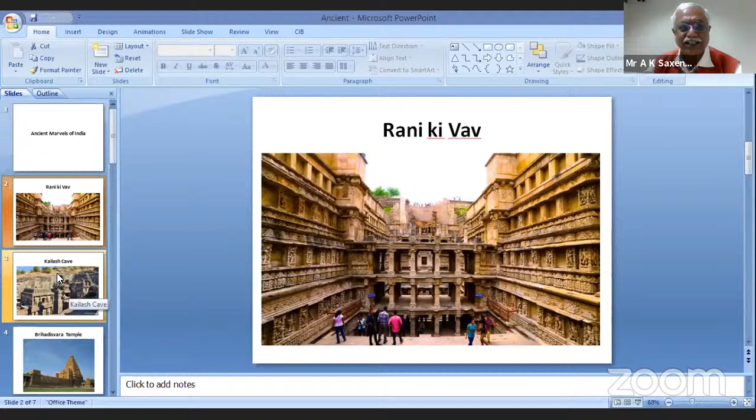Next we come to Kailash Cave, which is part of the Ellora Caves. It was built in the 8th century. It is a real wonder because all the construction has gone from top to bottom, and it is worth mentioning just like any other wonders of the world.

Next we have the Brihadisvara Temple, which is in Tamil Nadu. It is an 11th century temple with no foundation. Pranam, Minister Sahab, Namaskar, welcome. Sir, Namaskar.

It is 66 meters in height with no foundation, built with granite, and the granite is not found in that area. It is simply a marvel how this was constructed. The main point is that the Vimana, or the tower above the Sanctum Sanctorum, does not cast a shadow even at noon time.

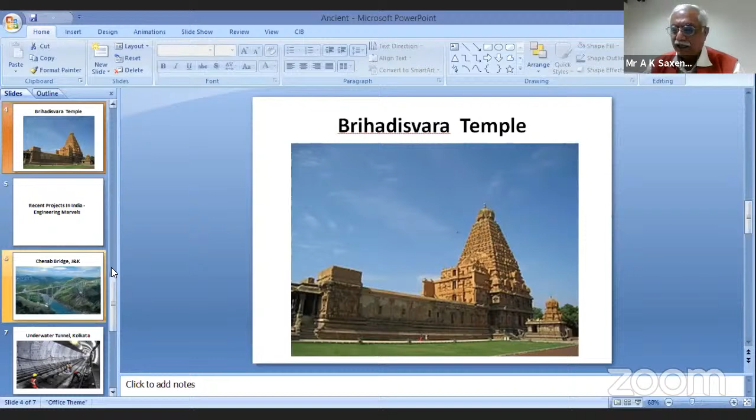With this, we move forward. The construction industry has traditionally been labor intensive, and mechanization was never resorted to. In those days, the speed of construction was very slow, and generally the projects got delayed, causing cost overruns.

With liberalization and globalization, the speed of civil construction has increased manifold. Under the dynamic leadership of our Honorable Minister, a 2.5 kilometer 4-lane concrete road was completed in 24 hours, and 26 kilometers of single-lane bitumen road was completed in 21 hours. Another example was the Instacon Tower in Mohali, Punjab, a 10-story building completed in 48 hours in 2012.

India's economy is likely to grow 2.5 times to $7 trillion by 2030, making India the world's 3rd largest economy. For this, much improved infrastructure is required. The Sagarmala project and Bharatmala Pariyojana are programs for development of infrastructure. Our Prime Minister has recently launched the National Master Plan Gati Shakti to connect the economic zones.

A large-scale migration has been witnessed in the urban sector. In order to meet the growing needs, the government has launched the Pradhan Mantri Awas Yojana and affordable housing schemes. All these have put increased pressure on the construction industry, forcing them to think about mechanization and generate innovative ideas to meet demand. Civil engineers in India are not lagging behind.

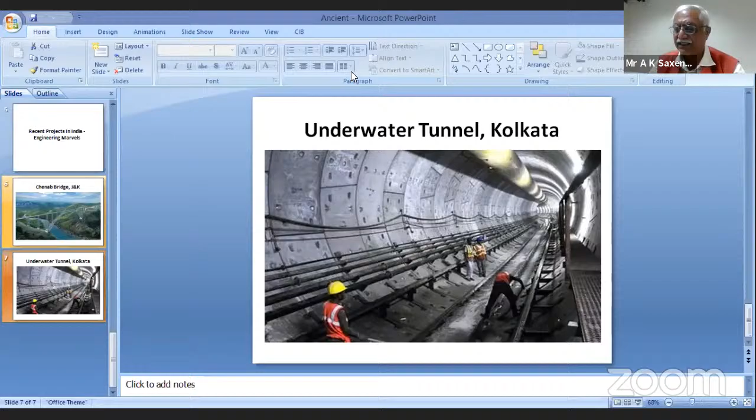Technology is perhaps the greatest agent of change, and it is evolving at an ever accelerating pace. There is a need to develop innovative technologies which will reduce costs, save natural resources, protect environment, and help improve quality of life. In future, we have to look for self-healing concrete, thermal bridging, photovoltaic glass, kinetic footfall, kinetic roads, predictive software, 3D modeling, modular construction, plastic roads, and green roof systems.

Keeping in mind the national agenda, the theme of the 36th National Convention of Civil Engineers was chosen as Innovation, Mechanization, and Modern Techniques in Civil Engineering. It is hoped that the deliberations over today and tomorrow will help the planners to meet the requirements for India to achieve its goal of a 7 trillion economy.

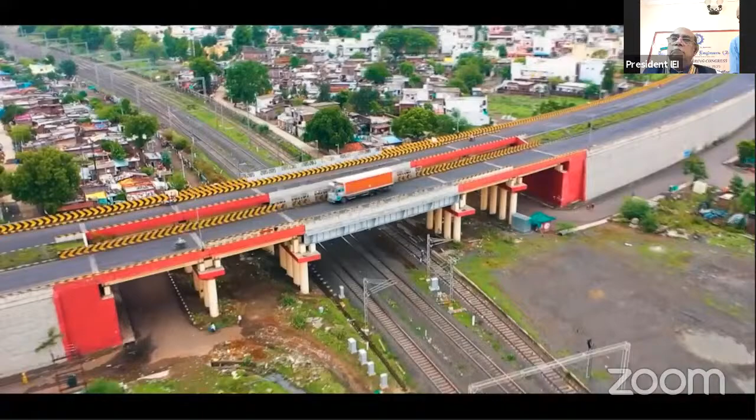The outstanding Swarnim Chaturbhuj Yojana, of which Shri Gadkari ji was chairman, is the culmination of these efforts. 55 flyovers dotting the city have made commuting in Mumbai much easier than ever before. The foundation for the magnificent Bandra-Worli Sea Link was also readied during this time.

The jewel in the crown of Maharashtra, India's first expressway, the world-class Pune-Mumbai Expressway, is also a futuristic project imagined and brought to fruition by Nitin Gadkari. Connecting over 13,000 unconnected villages with an all-weather $100 million project is another feat accomplished by this far-sighted visionary.

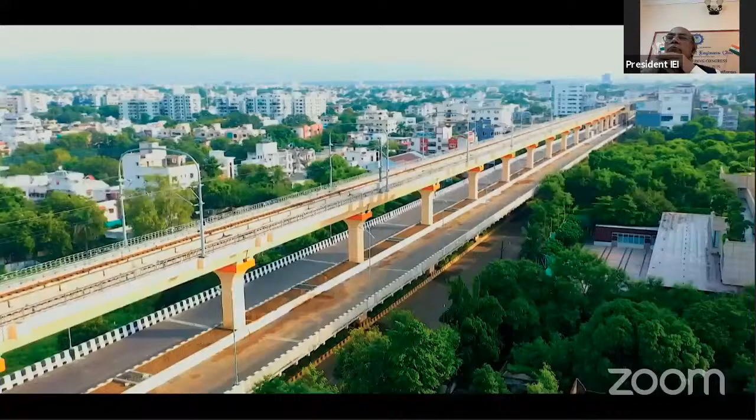Nagpur, his hometown, has seen the first of its kind double-decker bridge, with innovative beautification of flyovers using local artists and paintings of great political and social leaders as an added attraction. Ajni Intermodal Station will have connectivity between long-distance buses, city buses, railways, metro and an indirect link with the city airport.

The Nagpur Broad Gauge Metro is a commuter rail project planned for Nagpur city, extending up to adjacent areas of Wardha, Narkhed, Ramtek, Bhandara and Chhindwara.

World-class institutions like IIT, IIM and AIIMS emerge and thrive under his watchful gaze. This is in addition to over 1,000 Ekal Vidyalayas that go a long way in molding future tribal generations. Performing over 10,000 successful heart surgeries is another stupendous achievement in his illustrious career as a warm-hearted do-gooder.

The city of Nagpur is the first city to explore alternative biofuels for transport, including Bio-CNG buses. His innovative idea of India's first of its kind CNG-run tractor has proved to be farmer-friendly, cost-effective, and helpful in reducing air pollution.

In a historic push for biofuels, Gadkari ji is introducing flex engines which will run on 100% ethanol, directly providing additional income to farmers and the agricultural sector.

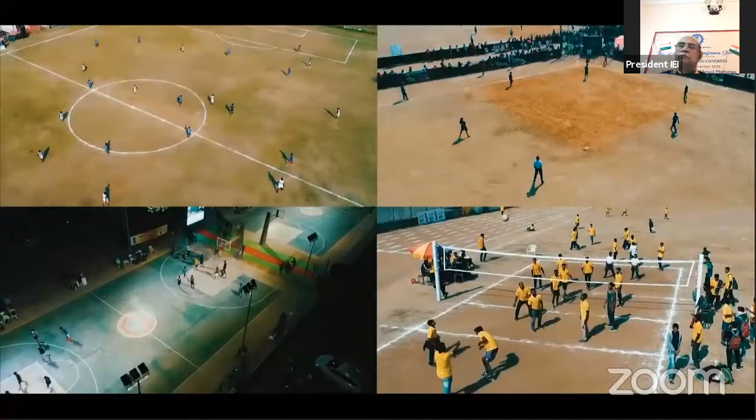Sanskritik Mahotsav motivates local artists to go national. Krida Mahotsav supports local sportsmen to showcase their abilities and motivates them to go national and Olympic level. Projects like AgroVision are helping farmers with the latest technologies and practices.

His idea of using sewage water for power generation, and the use of ethanol as fuel, have added a whole new dimension to the city's development program.

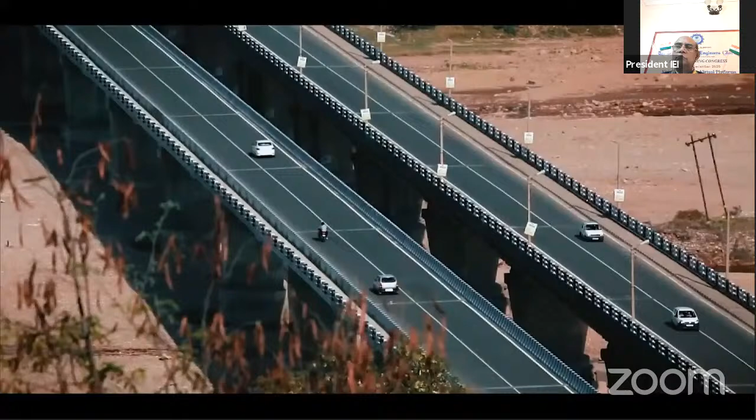As India's current Minister of Road Transport and Highways, he has re-energized the whole sector with his clear vision. With more than 40,000 kilometers of national highways constructed in the last 7 years, 60,000 kilometers of new roads are being constructed under his supervision. The speed of road construction has grown from a mere 3 kilometers per day in 2014 to 40 kilometers per day in 2021.

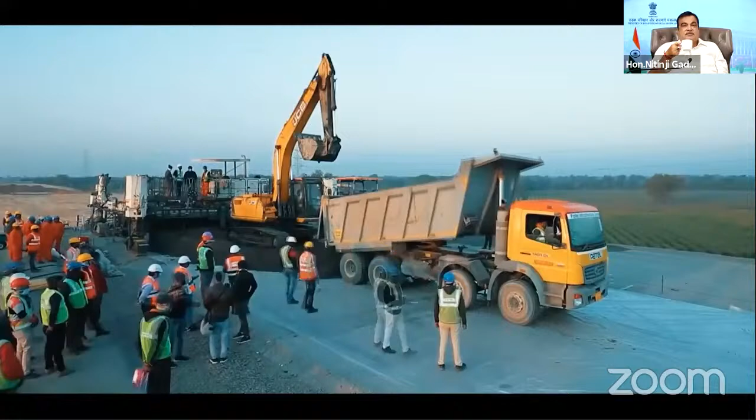The dazzling Delhi-Mumbai Expressway has set 4 new world records, with 12,500 cubic meters of concrete being laid down on a 4-lane stretch of 25.4 kilometers.

These world records are as follows: highway construction rate at 37 kilometers per day, construction of a 2.5 kilometer long 4-lane concrete road near Vadodara at the Delhi-Mumbai Expressway in 24 hours, and laying down of a 26 kilometer long bitumen road at the Solapur-Bijapur section of NH52 in 21 hours.

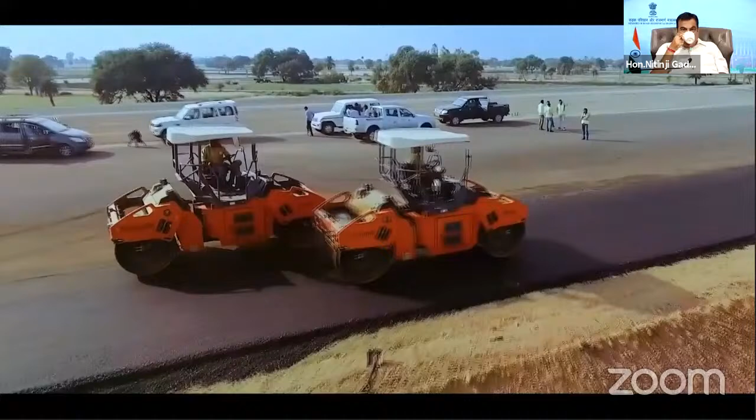A 50% growth in the length of national highways in the last 7 years of the NDA government is a monumental achievement. The figures went up from 91,287 kilometers to 1,37,625 kilometers. Going further, INR 3.32 lakh crore is allotted for 22 greenfield expressways, initiated by the bridge-building messiah, as he is fondly referred to.

Bharatmala and Sagarmala, 2 world-class access-controlled expressway projects led by Nitin Gadkari, are presently in various stages of construction. The Bharatmala project seeks to eliminate the perennial road traffic movement imbroglio across the country.

With Nitin Gadkari taking charge, India's much maligned logistics sector has also metamorphosed from a point-to-point model to a hub-and-spoke model. This multimodal transport system integrates railways, highways, inland waterways and airports, creating a highly effective transportation grid, substantially reducing logistics costs and pollution. 35 multimodal logistics parks, 50 economic corridors, and 10 intermodal stations are being readied for this monumental effort.

Logistics summits with international participants, including government organizations and the World Bank, leading to MOUs worth 2 lakh crore, have been held to add muscle to the initiative.

Among his other endeavors, unprecedented progress is evident in port industrialization, national waterway traffic, jetties for coastal tourism, Ganga-Yamuna cleaning, fundraising, asset monetization projects, and toll-operate-transfer.

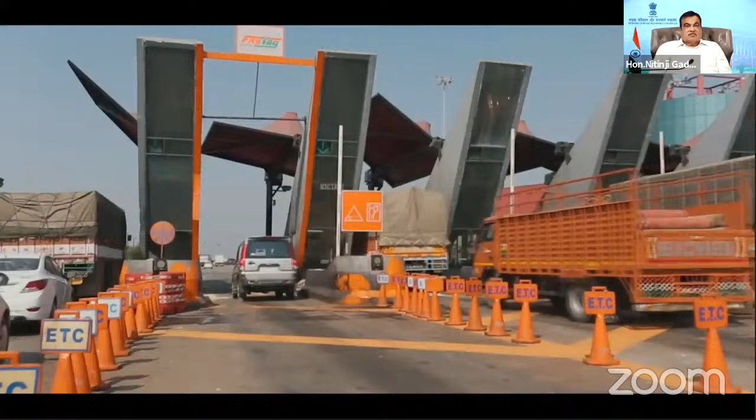As MSME Minister, he has gone all the way to promote entrepreneurship, helping rural youth adopt Khadi as a means of self-employment. The MSME Ministry has also found wings under Mr. Gadkari, who changed the definition for classification of MSMEs.

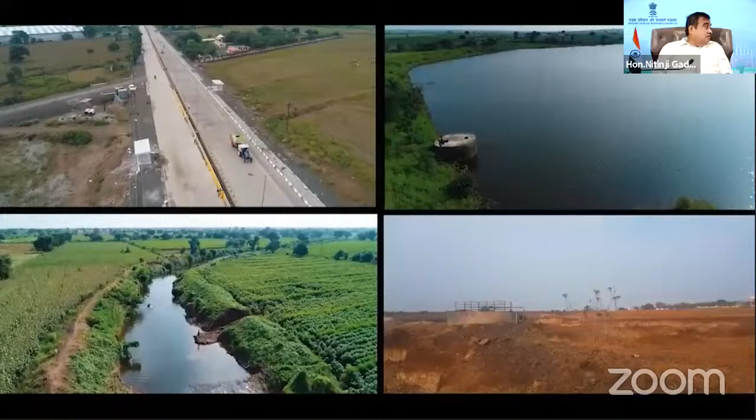Now, a company investing 1 crore and earning a turnover of 5 crore will be classified as micro company. The portal Udyam Registration (UR) offers faceless, fully online, paperless and transparent MSME registration process, fully integrated with income tax and GSTN systems. His brainchild, Jal Kranti, the Buldhana pattern of water conservation which changed the economy of villages by rejuvenating water bodies, has won a global award.

Mr. Gadkari introduced the first ever vehicle scrapping policy, which proved to be the fight against pollution and in the interest of road and vehicle safety. The new FASTag policy is helping commuters save their fuel and time on toll plazas.

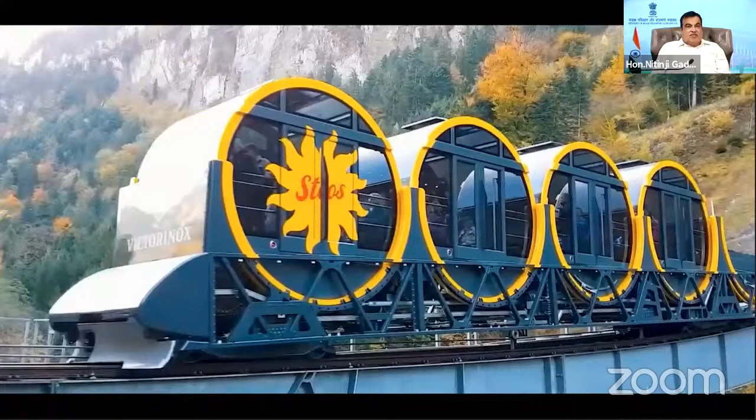Some of his major work includes an unprecedented push for research and development in electric vehicles, leading research and development for usage of waste materials in highway construction to cut down construction costs and generate wealth out of waste, developing ropeways and funicular railways in the remotest parts of the country to boost tourism, and the Panchgaon project for women making carpets from scrap cloth, a classic example of women empowerment.

Khadi Prakritik paint, made from cow dung, is aiding employment in rural areas and has exponentially improved the rural economy. When all industries were shut during the pandemic, Mr. Gadkari empathized with people by conducting webinars and over 800 video conferences.

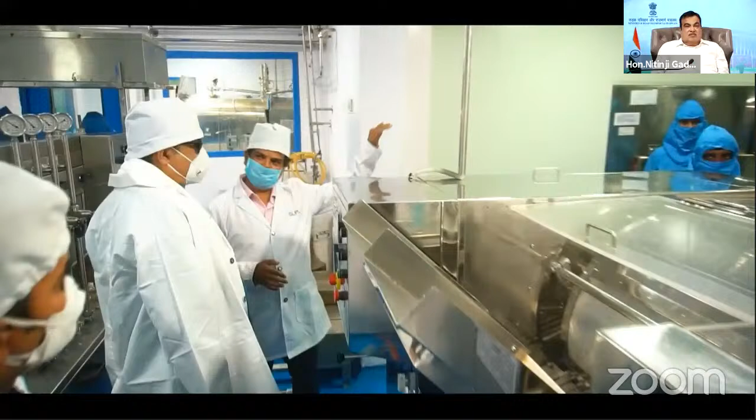His quick decision making in procuring oxygen and PPE kits helped those affected by the deadly virus. He generously donated ambulances to NGOs, helped set up oxygen plants, and set up factories to make remdesivir injections and injections for mucormycosis. Thus, by showcasing strong leadership and taking quick decisions, he handled the COVID situation effectively.

His affable nature goes beyond everyday personal equations as he continues to transmit his radiance and ideas to every individual or organization with his unmatched zeal. Gifted with an ability to dream the seemingly impossible dreams and bring them to fruition also defines this clairvoyant visionary. Nitin Gadkari shines on as one of modern India's pioneering leaders, and his work stands as a template for the coming generations. If there ever was an infrastructure man of India, he would answer to the name Nitin Jairam Gadkari.

May I request the chief guest, President of the Institution of Engineers, President-elect, and all other dignitaries to kindly release the souvenir which has been brought out on this occasion.

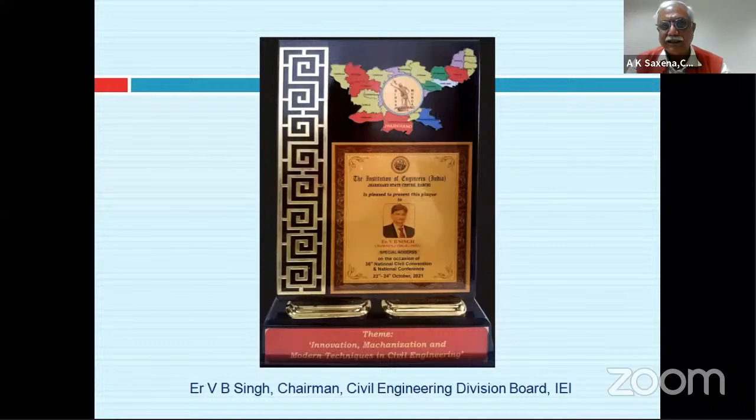To conclude the inaugural session, I would request Engineer Jitinder Kumar, Honorary Secretary of the Jharkhand State Center, to propose the vote of thanks.

Very good morning to our dynamic respected chief guest, Honorable Minister, Government of India, Shri Nitin Gadkari Sahab, Engineer Narinder Singh, President, Institution of Engineers, Engineer Thakre, President-Elect, Institution of Engineers, Engineer V.B. Singh, Chairman, CVDB, Engineer A.K. Saxena, Chairman, SCF, Shri Ranjan Singh, Chairman, Jharkhand State Center, past Chairmen, Secretary, and members. First of all, my congratulations on the 36th National Civil Convention and Conference. It is my privilege to offer the vote of thanks on this occasion. It is a proud moment for the institution that the most dynamic Honorable Minister Mr. Nitin Gadkari Sahab has kindly graced the National Civil Convention Conference as chief guest. Thank you very much for your time.

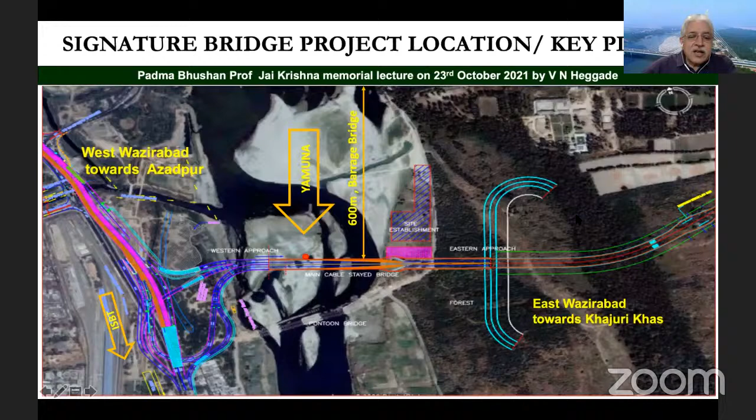This project consisted of two packages. One is the signature bridge, called package two, and the other, on either side of the western and eastern approaches, we had two more projects. That was a contract called the Wazirabad approaches contract. Both together amounted to around 1,500 crore rupees.

The signature bridge cost around 900 crore rupees by the time of completion, and the approaches cost around 450 crores. For both these projects, I was involved from the inception to the completion. As such, I am delivering this lecture as the constructor from inception to completion, or the commissioning and inauguration of this bridge, today.

This particular area was meant not only to ease the traffic from the western approach of Wazirabad to the eastern approach, but also to be developed into a tourist attraction. That was the plan way back in 2005 and 2006.

When the bridge was conceived, Sheila Dikshit, the Chief Minister of Delhi at that time, said, 'I don't want a run-of-the-mill bridge here. I want a bridge that is not built anywhere else in the world. When this area is developed, this bridge should be the tourist attraction, and the location should be known by this bridge. I want such a bridge at this location, so that not only does the area become a tourist attraction, but it is also known by the bridge itself, as historically happens all over the world, where the location is known by the artifact which has been built.' So that is how this bridge was inspired by the leadership of that particular time.

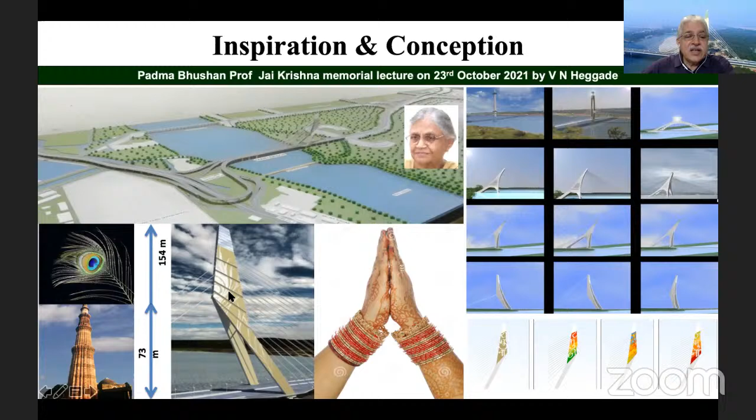Ultimately, this Namaste pose bridge was conceived and was to be implemented later. So as a run-up to this bridge, there are many historical moments, as you can see here. One moment is Sheila Dikshit's demand that she wanted a bridge not built anywhere else in the world. Second, if you really look at it, the bridge is not a conventional form following the forces kind of structural form.

In this bridge, the form is not following the flow of forces, following the shape of a namaste, the Indian welcoming pose.

This particular bridge, after many deliberations, was approved by Charles Correa, and the bridge was tendered three times before being finally awarded to the joint venture. All three rounds of tendering happened only because the price was found to be higher.

Ultimately, when it was referred to the Metroman of India, Sridharan, who was very active at that time during the fame of DMRC, the Delhi Metro Rail Corporation, he told the Chief Minister, when she said it was a very expensive bridge and that with the same cost two bridges could be built, that a Rolls-Royce cannot be constructed or bought at the price of an Ambassador.

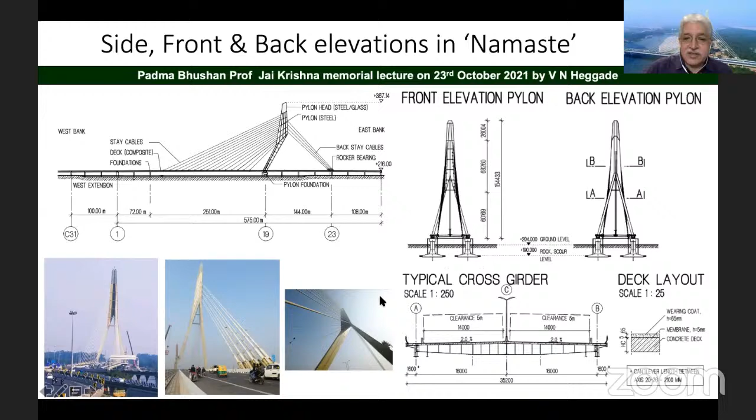I'll come to the explanation of the composite deck girder later, where I'm going to explain the fabrication as well as the erection of this one. Let me explain about the foundation and substructure aspect of this particular bridge.

This bridge had a 35.2 meter cross section, catering for 8 lanes of traffic, 4 lanes in each direction. The foundations were in 2 independent posts, as you can see here.

There were around 3 into 2, that's 6 number of open foundations, what I call deep open foundations. Though it's an open foundation, it's called the deep open foundation. There were also around 16 number of well foundations, as you can see here. Out of this 16, 2 were hybrid foundations, which I'm going to explain. That very innovative design and construction of this foundation is a hallmark of this bridge, which I'll explain later.

It has 2 planes of cables on the reverse side of the bridge, with 15 cables into 2 numbers, 2 planes each having 15 cables. On the other side, around 8 cables, 2 planes of 4 numbers. So total number of cables is 38. I'll explain the cables in detail later during the explanation of the bridge itself.

You can see in this photograph the construction of the foundations at the 2 independent posts, which is going on here. It's a Google image taken during construction. The pylon foundation is called the P19 foundation, which was very famous, and the backstay foundation is the P23 foundation. The rest of the foundations are normal conventional well as well as open foundations.

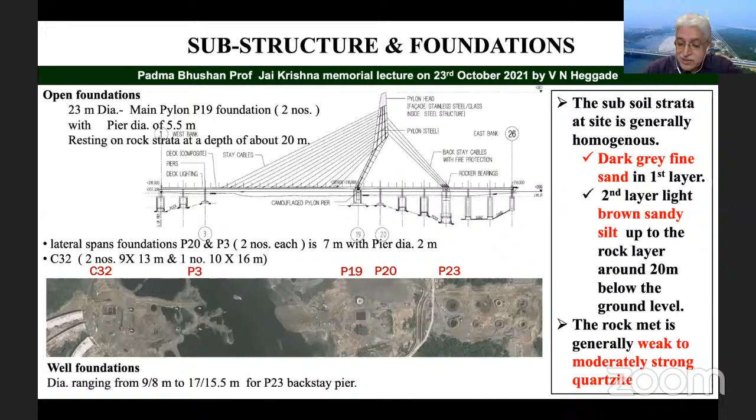The special foundations were P19 and P23, which are very famous worldwide at this point in time. It's very interesting to see the substructure, the bearing arrangement within the bridge system. It has around 2 fixed bearings at the pylon base location and 20 free bearings at different locations, shown here in violet color. There are also 2 longitudinally guided bearings, and importantly, a rocker pendulum bearing at the P23 foundation location, whose significance I'll explain later.

At the pylon foundation, there's a spherical fixed bearing of capacity 17,100 tons, the largest capacity bearing in India, perhaps, and maybe the second or third largest in the world. There's also a special rocker and pendulum bearing provided at the P23 location, because it has to neutralize an uplift force of around 6,380 tons.

This uplift force, because of the peculiar configuration of this bridge, has to be neutralized and ultimately transferred to the founding strata, so this bearing had to be provided. You can see here the rocker pendulum bearing configuration. It's a very significant bearing, and I'm going to explain the installation, fabrication, and erection of this bearing in detail.

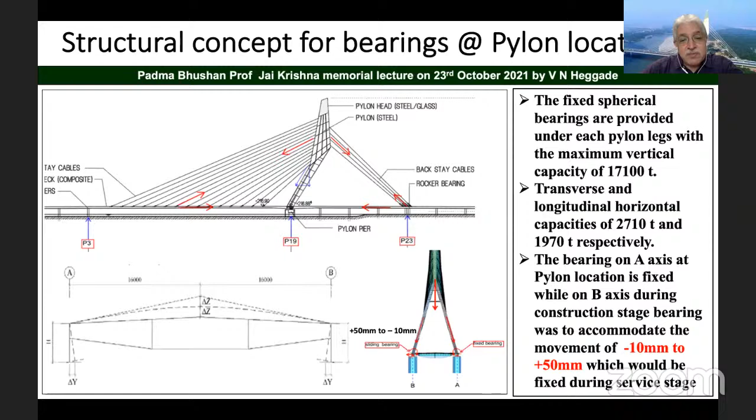On one side, during construction, it is fixed. On the other side, a play of around 60 mm is allowed. So the bearing has to be capable of absorbing 60 mm of play during construction. That was one of the specialities of this bridge.

Coming to the foundation, there were around 6 open foundations, as I explained earlier. All 6 open foundations were deep foundations, with founding levels varying from 10 to 20 meters depth at the river portion as well as at the embankment portion. In fact, the P19 pylon foundations were also deep open foundations.

Various excavated lateral systems in the form of sheet piling were examined. Some variations examined: one option was 2 independent foundations, as you can see here, combined with a single sheet piling cofferdam. Another option was an independent circular sheet piling cofferdam.

Ultimately, it was decided for all 6 open foundations to go for an independent square sheet piling cofferdam, as you can see here. Though the circular sheet piling would have been more economical in terms of quantity, from a construction point of view it was very difficult to build. That's why we went for the square type of sheet piling. These are some views of the sheet piling being done, and this deep open foundation sheet piling was done, as you can see here.

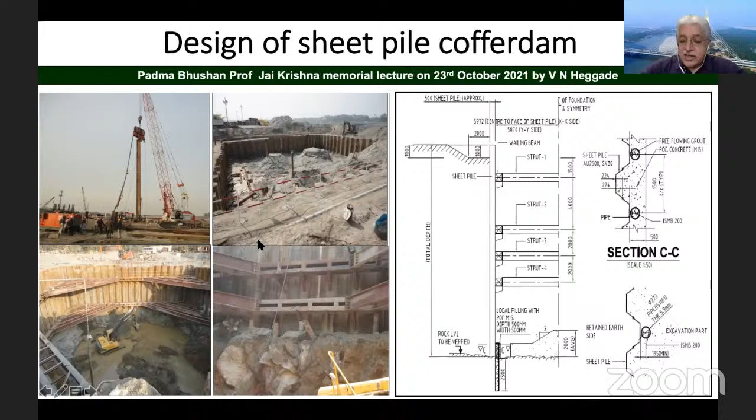These specially designed pins were installed over here, and this is one of the significant contributions of the design. These grouted pins within tubes have some reinforcement or steel segments, as you can see here, ISMB 200 within 273mm, later grouted to provide stability to the sheet piling, and that's how it has been done. At the location of the pylon, the deep open foundation was up to the level of 20 meters.

Up to the level of 20 meters, the sheet piling was to be driven earlier, and the open foundation was around 20 to 23 meter diameter, varying from edge thickness of 2.5 meter to 4.5 meter at the root of the pier. The pier was around 5.5 meter, and also the height of this pier cap, as you can see here, is 5.5 meter. This pier cap supported the independent pylon legs, as you can see here, which I'm going to explain.

The pier, as well as the pier cap, is constructed by conventional shuttering, as you can see here. But for the construction of the open foundation at the bottom, around 20 meters, we had to adopt sheet piling.

As you can see, I think there is some disturbance, sheet piling, particularly for the P19 foundations.

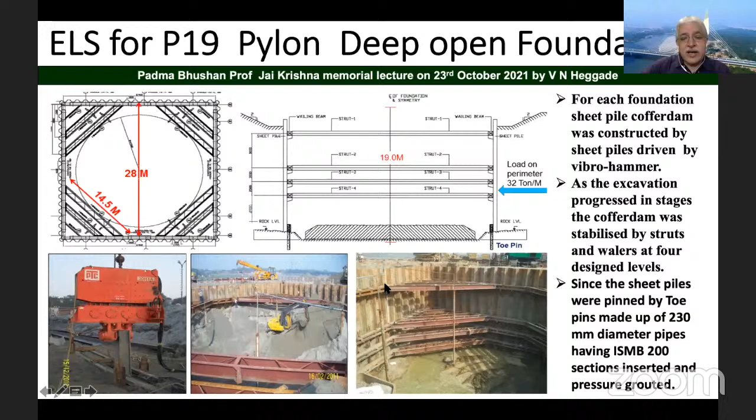Particularly for the P19 foundations, we had to have the strut and waler system at around 4 levels as the excavation proceeded, to stabilize the side slopes. As you can see here, naturally we had to have the pin arrangement, as I explained earlier, and the vibro hammer was used for driving the sheet piling, as you can see here.

Almost around 1,650 cubic meters of concrete was to be done at one go, which was done in one go.

But as it is mass concreting, and this kind of concreting has to be done at one go, a proper arrangement for chilling or controlling the temperature within the concrete was to be done.

This had around 280 tons of steel embedded into this foundation, and the reinforcement fixing itself of 280 tons at this level took around 40 days for us, and with a lot of precautions, this foundation was done.

You can see the brick wall was constructed as shuttering for this open foundation, which is at around 20 meters below the ground level.

A well designed well point system was designed for lowering the water table so that water is not ingressed or seeped into the pit, which has been supported by the sheet piling arrangement over here. Also, 35 HP pumps are used inside the sheet pile coffer dam for exclusion of the water within that. That's how these open foundations were done.

After having done the pylon foundation, it was very necessary for us to install the bearings which had been fabricated in Maurer Söhne and inspected for quality control purposes, to be installed on top of this pylon pier caps, as you can see here.

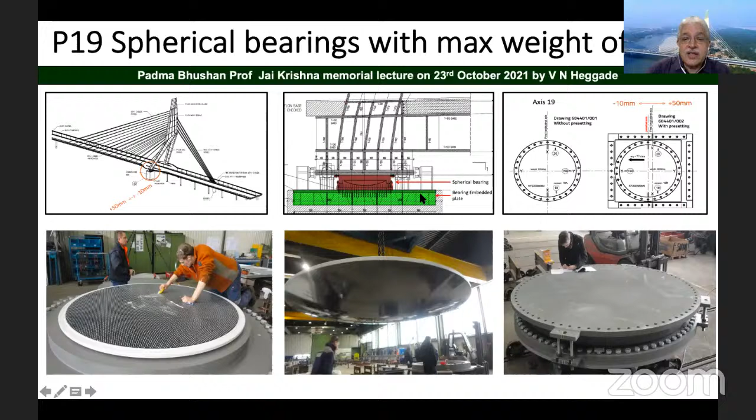These bearings were to be fixed on the bottom plate. As you can see here, this bottom plate is a part of the pier cap over here, and you can see the pier cap and the bearing. Under this, there is a bottom plate.

This bottom plate has to become a part of the pier cap on top of it, and the installation of the bottom plate while casting the pier cap itself was a project in itself. As you can see here, there is a frame which is hanging the bottom plate of the pier cap. Meticulously, the reinforcement of the pier cap has been fixed. After that, the shuttering has been put all around.

Once the shuttering is put, the pier cap bottom plate is held by this structural frame arrangement. Then the concreting has been done, and you can see the pier cap bottom plate which is ready to receive this bearing. The bearing is put on top of this bottom plate, and it is fixed to this bottom plate.

Then the pylon base, weighing almost 450 ton, is lifted by the 1,250 ton capacity crane and put on top of it. Here you can see the view of the pylon base being lowered on the bearings. So even the installation of the bearing of 26 ton capacity, and also the casting of the pier cap itself, required highly engineering calculations as well as engineering methods to be adopted in this prestigious bridge.

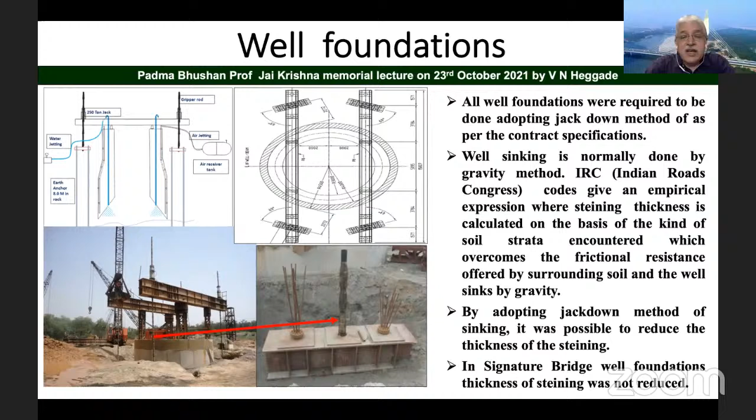All the well foundations, as per the contract conditions, were to be done using the jack-down method of sinking, and some of the views of the jack-down method of sinking are shown. I'm sure many people conversant with well foundations are aware of the jack-down method of sinking. Though the jack-down method could have reduced the thickness of the steining, it was not done that way. The jack-down method of sinking was only used for the purpose of controlling tilt and shift during the sinking of the wells, but it was not used for reduction of the steining, thereby the economization of the well foundations, as you can see here.

Another innovation introduced for the well foundation was the micropiling, by the contractor's designer. As per the original design, the well foundation was to be sunk up to the top of the rock by around 500 millimeters, that's around half a meter. Once it reaches 0.5 meter above the rock level, the well foundation was to be supported on the stools, as you can see here. The provision of the stools and the concreting for insertion of the stools, after the well has gone up to there, was a risky proposition, because in the water the divers had to be sent to put the stool. It was a highly risky operation.

In view of that, the contractor designed this micropiling arrangement through conduits of around 230 mm which have been left through this steining. The micropiling was done, and this micropiling acted as an enabling structure for the pile bottom plugging, as you can see here. That is another innovation which was introduced in the sinking as well as the construction of the well foundation.

Unfortunately, this P23 well foundation, which is a backstay foundation, as you can see here, had to neutralize around 6,380 ton uplift load, and was a very crucial foundation coming in the forest area. This forest area was only made available to the contractor after 30 to 36 months of the elapsing of the contract period. In fact, this particular foundation, being a very crucial foundation, was coming on the critical path, but it was handed over to the contractor after 36 months.

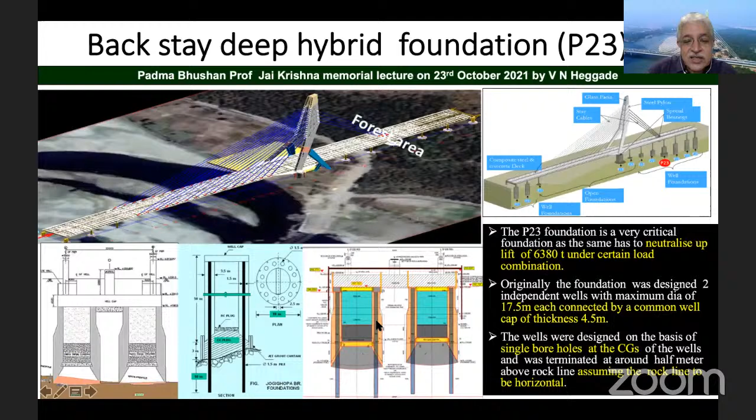In this particular case, what has been done is through the well foundation, as you can see here, the conduits were left while the sinking of the well. There were around 16 numbers of 1.2 meter dia piles proposed. As the well foundation is sunk, the conduits are left within the well steining, and this pile foundation was to be embedded into the rock.

The sloping rocks, as you can see here, these are the two independent well foundations, embedded into the rock by around 6 meters, done using this RCD rigs after the well is sunk up to around 0.5 meter above the earliest rock level.

Once the piling has been embedded into rock by around 6 meters, the bottom plugging is done. After the bottom plugging, this particular foundation has to neutralize the uplift of 6,380 ton load, as I explained earlier, and we also had high density concrete of around 3.5 ton per meter cube density, or specific gravity as they call it. That special concrete was used to increase the weight of this foundation, and that is how this P23 foundation was completed.

These are some views, as you can see here on the screen. The conduits during the sinking of the well foundation, as you can see here, 16 numbers of conduits of 1.2 meter dia, though the conduits were made 1.3 meter, giving a slightly higher inside diameter. This is the building of the curb along with the conduits, as specified in the contract, to control tilts and shifts.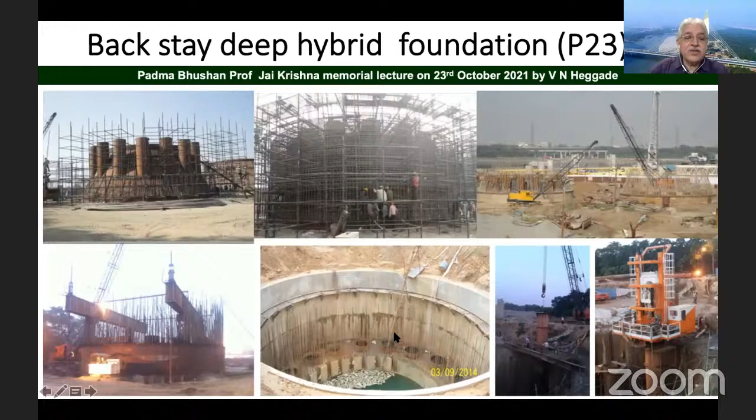The jack-down method of sinking was adopted even for this very crucial foundation. This is constructed up to the top of the well cap. The conduits can be seen here, through which the piling was to be done. This RCD rig, Bauer rig, was mounted on this conduit of 1.3 meter. Using this RCD rig, reverse circulation drill, the piling was done, and after the piling, the pile cap within this coffer dam, which has been left here, was to be done.

This is a very peculiar foundation, the substructure, the rocker and rocker pendulum bearing. The rocker pendulum bearing was conceived to take care of the 6,300 ton vertical uplift load, which comes under the critical combination. These are the rocker bearings, connected to 360 numbers of PT bars. These PT bars were embedded in the piers, and along with the pier as a transformed section, transfer the load to this well cap, which connects the two independent well foundations, a hybrid foundation, pile as well as well foundation.

This is the pile cap, and these are the 360 numbers of PT bars of 36mm diameter, which are pre-stressed, as I will explain later. Ultimately, whatever vertical load is coming will be neutralized by the rocker bearing links. These are the rocker bearing links, connecting the main girder to the 360 numbers of PT bars.

As you can see here, ultimately this uplift is transferred to the bottom stratum. That is a very ingeniously conceived transfer of uplift force at the backstay cable, done in this particular structure.

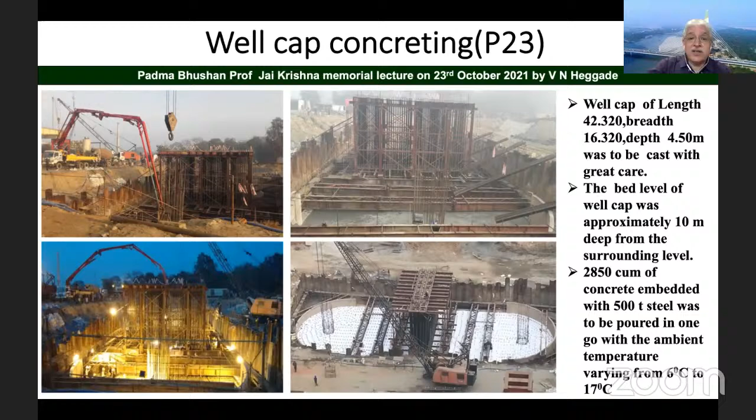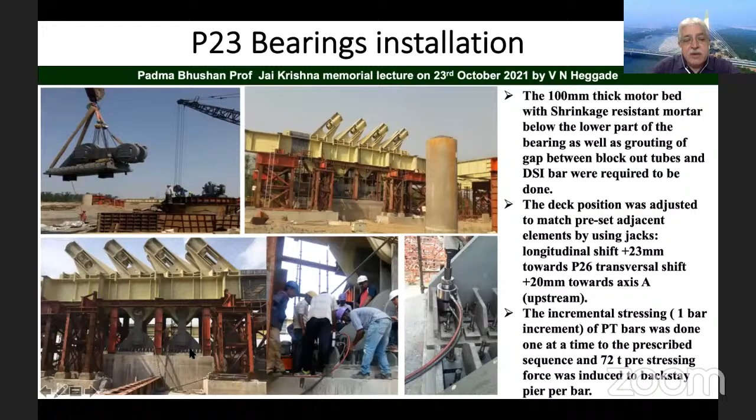After having put the girders on top of the temporary trestles over here, and after bolting it together, these links were vertically rotated upwards, and the pins were inserted. After having inserted all this rocker pendulum bearing, the bottom plate has to be grouted properly, so there's a proper contact between these bearings.

Another interesting part was that this entire superstructure was fabricated, deck as well as the pylon steel, in China. The bearings were produced or fabricated in Germany by Maurer Söhne, one part of the bearing, that is the top, the pin holding ring, which is coming in the part of the superstructure.

As you can see here, this was to be transported, sent to China for the fabrication purpose, so that within the deck, this pin has been introduced over here. So the transportation of one part which has to be integrated into the superstructure was logistically a challenging one, which was addressed properly.

I'll come to the superstructure part now. The superstructure is made up of steel, and the thickness of the steel varied from 2.5 mm thick plate to 250 mm thick plate, and the 250 mm thick plate is a very high plate.

In fact, in India, more than 80 mm thick plate was not easily available. That is one of the reasons we had to go all over the world to find contractors and fabricators who could do the fabrication with very high thickness plate. The team of engineers, including the client's engineers, the contractors' engineers, and the designers, took a global world tour. We went to the Netherlands, Italy, and China, and ultimately ZTSS in China was chosen as the fabricator for this particular job.

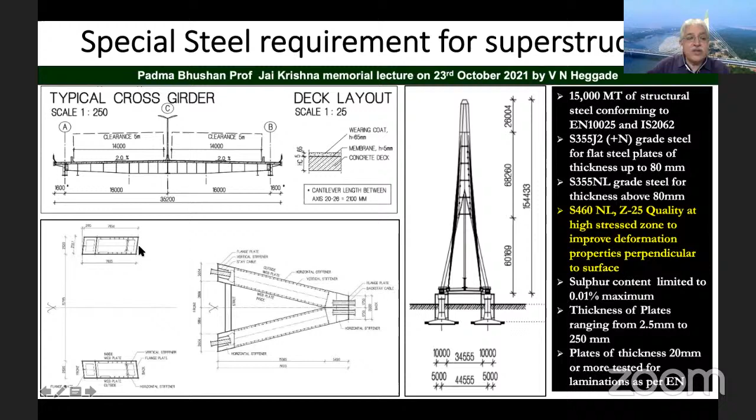After the pylon bodies merged and ended, the glass facade of the viewing gallery was stacked on top. The pylon legs varied in cross section from 2.5 by 7.6 meters to 2.5 by 9.6 meters. That was the enormity of the size of the pylon legs for this project.

For this project, Z quality steel was used. Z quality steel is a special quality steel where, in the Z direction, the steel properties are tested along the rolling longitudinal direction as well as the transverse direction. Since the thickness of the steel used here ranged up to 250 mm, from 2.5 to 250 mm, there was a threat of lamellar tearing.

Lamellar tearing happens when welding of one plate is done on top of an existing plate, and there's a possibility of horizontal cracking taking place. To prevent this, along the thickness direction, special ductile quality is required, and a special fabrication or manufacturing process has to be adopted by reducing the sulfur content. That is called the Z quality steel.

It is one of the projects where Z quality steel has been used in India. Understanding the complex structure was also very important from the fabrication as well as the trial assembly point of view.

Nowadays BIM has been specified and used extensively, but here it was not just specified, it was a necessity, to study the complex geometry of the pylon as well as the deck, to work out the exact weight of the elements, structural clashes, to plan fabrication as well as trial assemblies, and to plan even the erection sequences. It was very essential. Without BIM, like Tekla or Revit, this project would not have been completed.

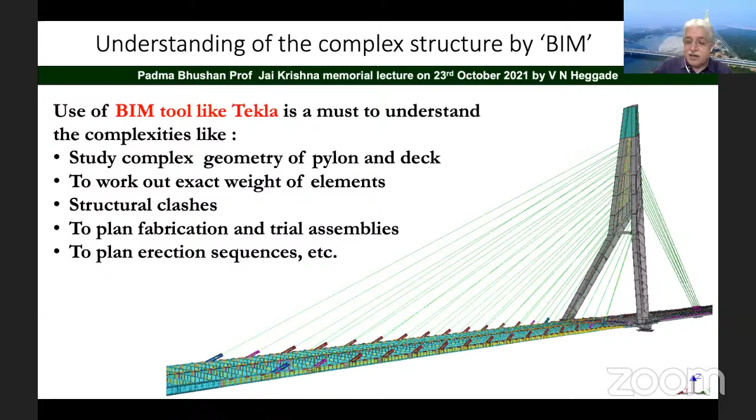So this is one of the Tekla models. Have a look at how BIM was very extensively used here to understand the pylon's complex geometry. The pylon base has so many internal diaphragms and stiffeners in the longitudinal, transverse, and depth directions. To understand that itself is very complex.

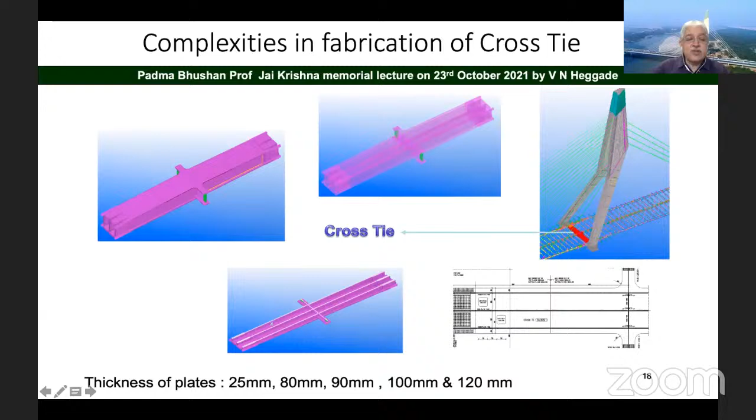The thickness of the plates varied from 80 mm to 250 mm in case of the pylon base. In case of the tie beam, which connects the two pylon bases, the thickness varied from 25 mm to 120 mm, as you can see where the pylon kink element is. Understanding the geometry and complexity of the fabrication involved there was very difficult.

Without the BIM or Tekla model, it would not have been possible for us to understand how the anchorage assemblies worked inside the kink. Even the thickness of the plate for this kink assembly varied from 10 mm to 100 mm. As I explained, at the location of P23, especially where the anchorage houses were getting connected to the P23 rocker pendulum bearing, the Tekla model was very useful for understanding that.

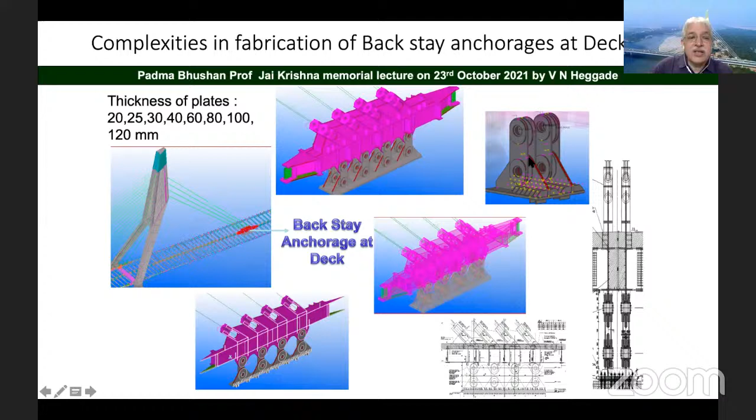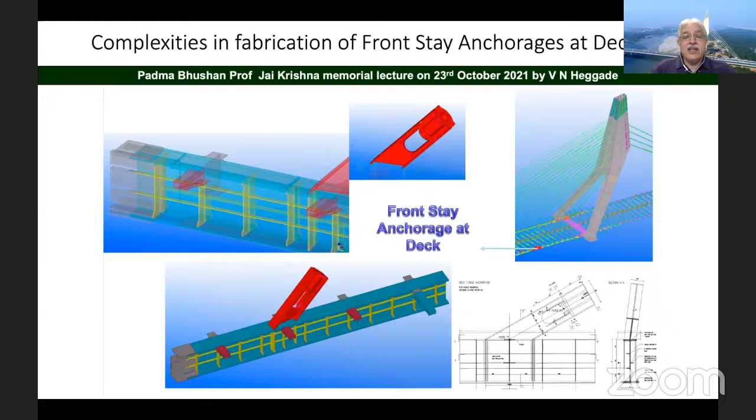The thicknesses of plates were varying from 20 mm to 120 mm. In the backstay anchorages, again another complexity, as you can see here. Without Tekla as well as the BIM model, perhaps it would not have been possible to understand and fabricate properly this complex structure. Even the anchorage assembly at the deck level, to understand and fabricate it precisely to that inclination, as well as the pylons, the inclination of this anchorage deck assembly was varying from one cable to another. To understand that, and to make sure the various thicknesses, the fabrication, and the trial assembly were done properly, the Tekla model as well as the BIM model was very, very important.

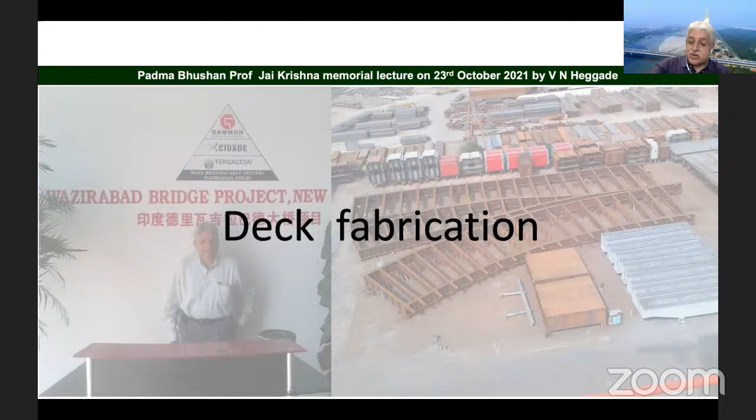The deck fabrication, as I explained to you, was done in China, at ZTSS, because 80 mm and above thick plates were not available, and fabricators capable of up to 250 mm thick plates were also not available in India at that particular point in time.

For the purpose of fabrication, the deck was divided into 37 segments. There were 3 standard segments as well as the remaining non-standard segments. Each segment had a cross girder, a longitudinal girder, and a central girder. The central girder was made up of an I connecting unit, as you can see here, the longitudinal central girder component. It's an I girder, as you can see here.

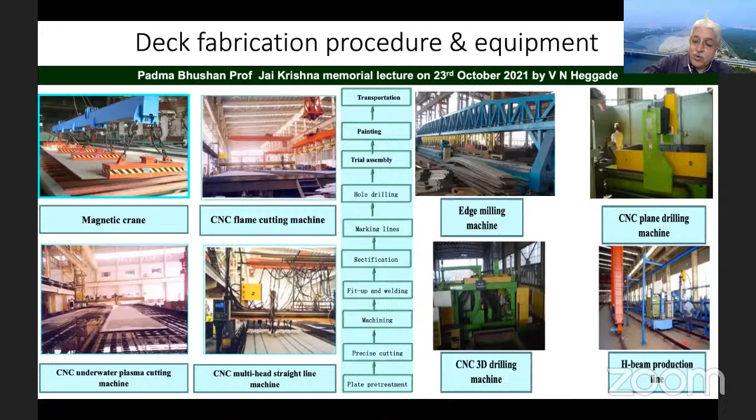All kinds of equipment were used for this complex fabrication: magnetic cranes for handling the cut sheets so deformation of the plates doesn't take place, CNC flame cutting machines, edge milling machines, CNC plane drilling machines, CNC underwater plasma cutting machines, CNC multi-head straight line machines, CNC 3D drilling machines, and H-beam production lines. Whatever the latest technology available was used for fabrication as well as trial assembly of both girder and pylon fabrications.

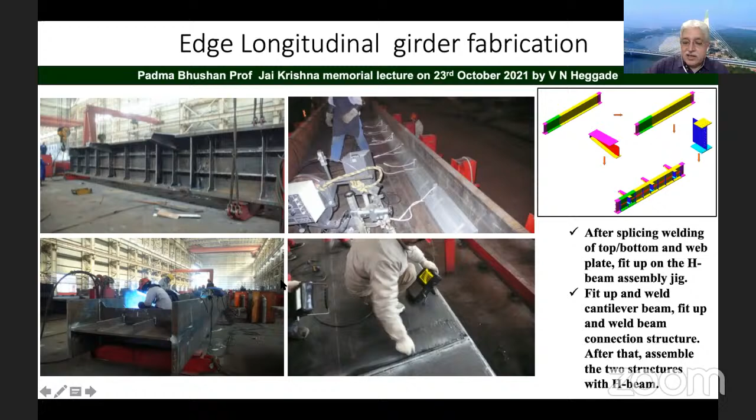These are some views of even the splice plate fabrication, and wherever required, machining was done. Since the girder within the cables, which I'll explain later, used machining surfaces, and it's not just compression forces in the cross girder, the longitudinal girders also used full contact compression joints. So proper machining was required in the longitudinal girder, and the splice plate had to be drilled with a drilling machine. As you can see here, some views of the drilling, machining, and splice plate preparation.

Finally, the trial assembly was to be done. The trial assembly is very, very important since the compression joint has been extensively used, even for the composite girder connections, and the trial assembly was done.

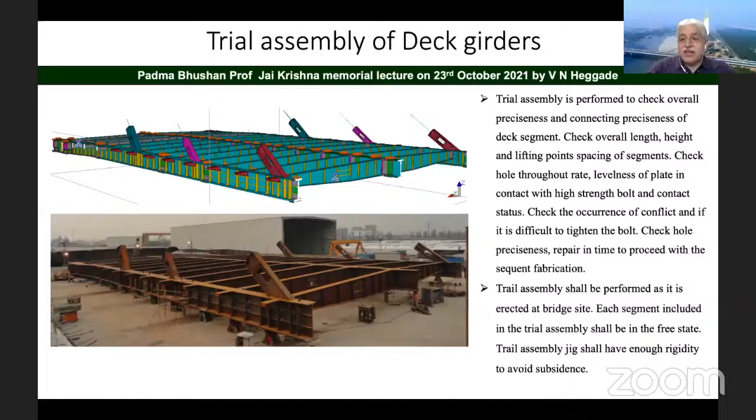Minimum 5 segments were used for the trial assembly, including the anchorage boxes, as you can see here. Trial assembly is a very important part of fabrication, especially when fabrication is done somewhere else and brought to the location to be assembled and erected. If trial assembly is not done at the fabrication location, the fabricated components brought to site may not fit into each other. To avoid that, trial assembly is a must for such a complex structure.

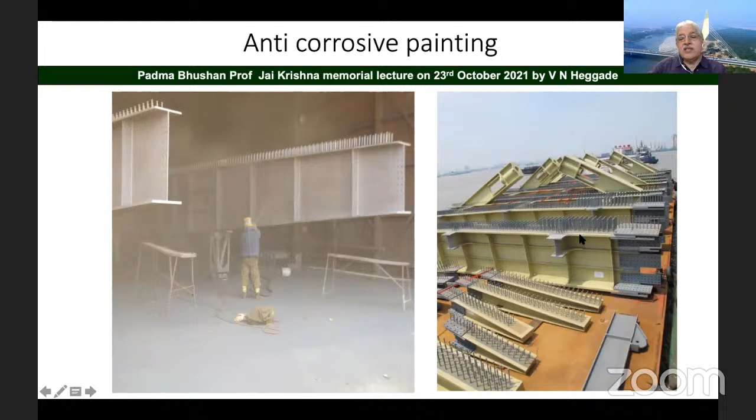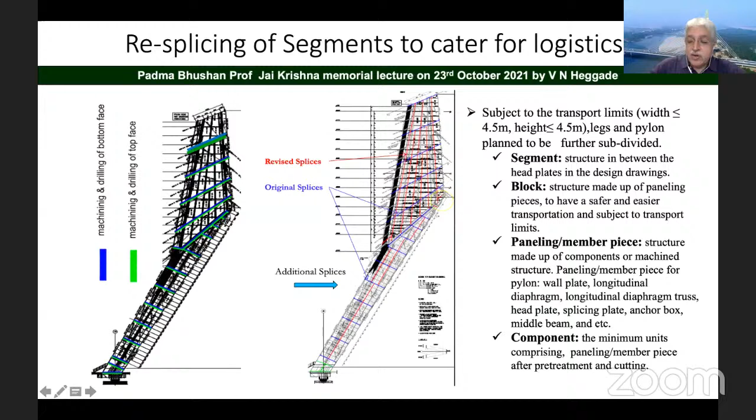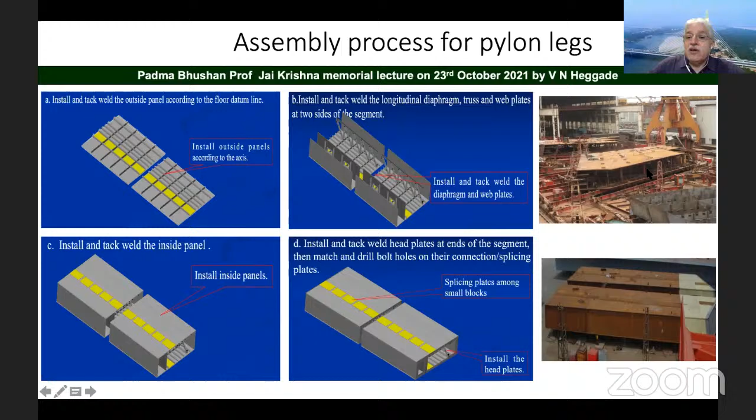The pylon base fabrication was a very Herculean task. As I told you, the pylon base was weighing around 450 tons. It was a very complex crisscrossing internal diaphragm arrangement, as you can see here, and the 250 mm thick plate had to be cut. It had plate thickness ranging from 80 mm to 250 mm.

While fabricating the pylon base, it had to be rotated or made upside down, as overhead welding was totally prohibited. Side welding or bottom welding was always encouraged instead. In view of that, after welding the bottom plate, for example after doing the stiffener welding, to do the welding at the top it had to be rotated upside down.

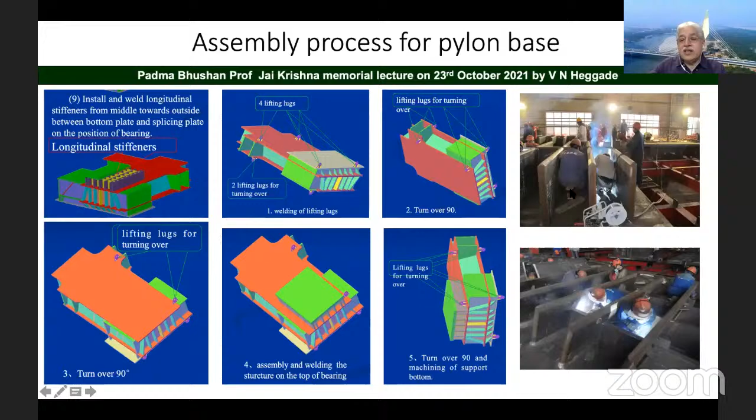During the fabrication, a lot of heat used to be generated, and we had to have a cooled environment so that it takes place. A very complex fabrication which was to be done.

After having done the fabrication, the machining was to be done. At this particular location, the machining equipment was not there, so it had to be taken to some other location. It was a barge mounted crane, and along with this crane it was transported to a nearby city where the machining arrangement was done and the machining was done, as you can see here.

These are some of the views of the pylon base which was fabricated, being handled at the fabrication factory. As I explained, machining is a very important part of this, and large areas had to be machined. Special machining equipment had to be brought, and the fabricator purchased special machining equipment which can machine up to 36 meter length. These are some of the views of the machining.

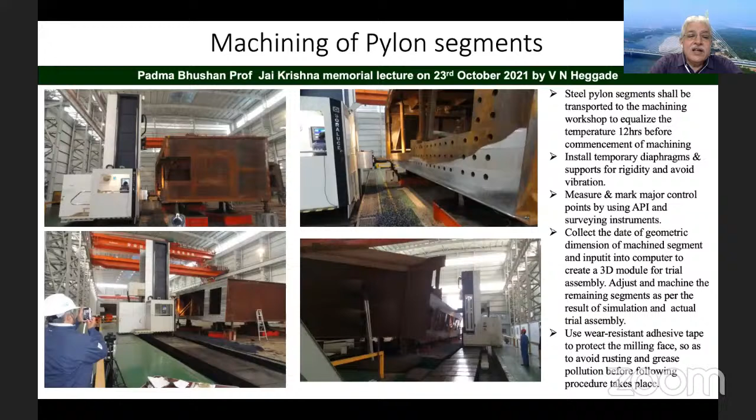Even for doing the machining, extensive BIM - building information modeling - techniques were used, in the form of application programming interface, theodolite or total station surveying, and also to control vibration during the machining of these large segments. Temporary stiffeners were used, and special jigs were designed so that subsidence does not take place, as well as deformation in the machined segment will not take place. So BIM was used for that purpose as well.

This is similar to precast segmental construction, where if the precast segments are not cast properly - if there are deformities or deformations not match cast properly between the two segments, in the form of improper casting - the small inclination introduced because of improper casting of the segment may finally lead to this kind of geometry in the precast segmental construction. It is similar to that.

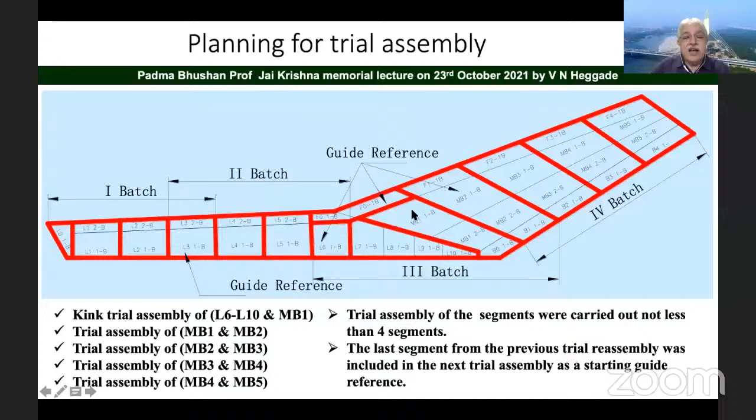This is a leg segment, and the entire trial assembly of L6 to L10 has been done once. For trial assembly of the subsequent segment, the previous segment, which was part of the previous trial assembly, has to be used as a reference segment, and it has to be ensured to have the proper geometry. If any deviation is observed during trial assembly, the correction has to be made at that particular point of time itself. These are some of the views of the trial assembly.

The trial assembly of the legs can be done vertically, as you can see here. It was not a very difficult task; only we had to engage heavy lifting arrangements like cranes and other things. As you can see here, these are some of the views of the trial assemblies of the kink portion as well as the pylon body portions.

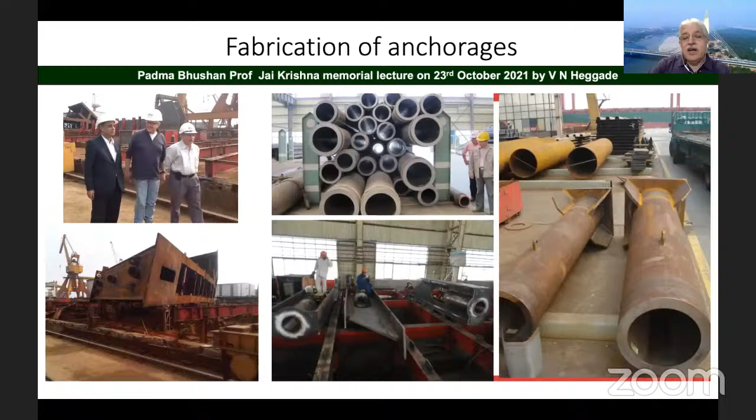Even the anchorages in the pylon body had to be fabricated to precision, so that the inclination of the anchorages embedded into the pylon body, as well as at the deck top, is perfect. That was ensured by engaging a supervisory team from India to provide perfect supervision for the fabrication done in China.

Even the temporary structure arrangement, like this temporary supporting structure you see here, was fabricated and trial assembled at the China Jiangyin fabrication factory. It was supervised by our people to precision before being shipped to India.

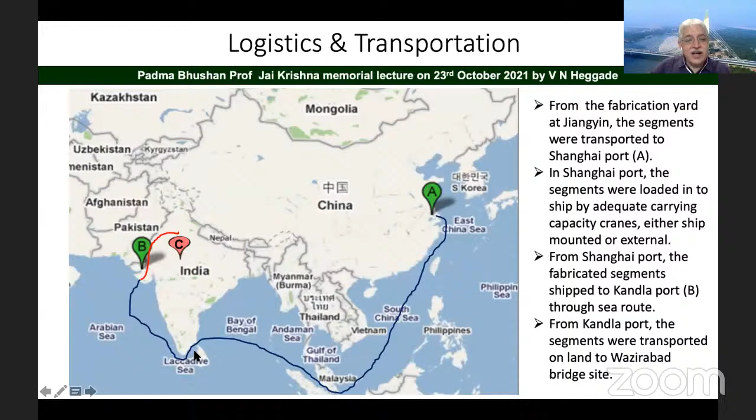One consignment almost took around 30 days. The route followed was from Shanghai to the bottommost tip of India, to Kandla port.

Once it came to Kandla port, these are some views before arriving there. These show the very heavy segment, around 450 tons, the pylon base, along with a jig. The jig was attached during transport from China to India so the pylon base segment would not deform, and here it is being loaded onto the ship.

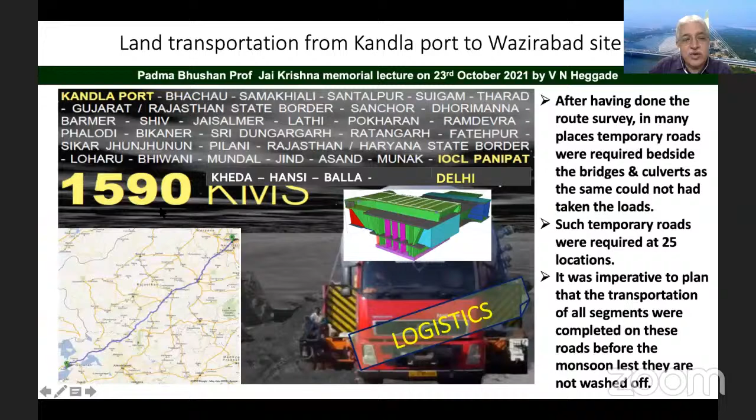Once it reached Kandla port, it had to be transported around 1,590 kilometers to our site at Wazirabad. It had to be ensured that the pylon base segment, the heaviest at 450 tons, and the longest segment, the cross girder at around 30.2 meters, which was a tie girder connecting the pylon base, were safely moved.

Before transporting it, the transporter did an extensive route survey for two months to ensure that all the culverts and bridges could take the load of 450 tons. The route survey was completed.

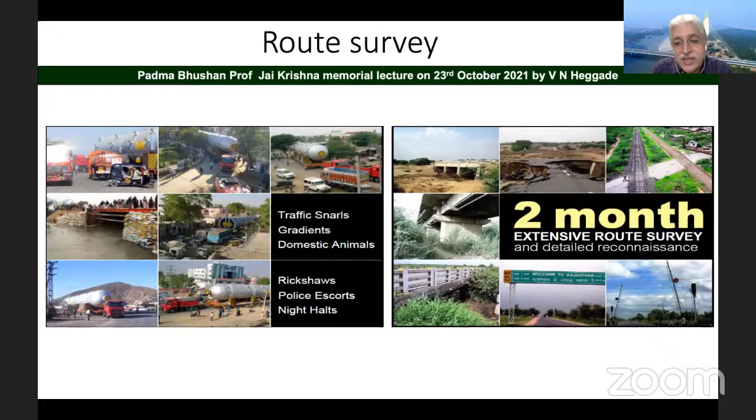It was identified that at 25 locations it was not possible to take the pylon base over the existing culverts and bridges. That is why special bunds, or temporary roads, were constructed beside these bridges, along with temporary bridges that had to be maintained.

The pylon bases and other segments had to be transported on these temporary bunds before the monsoon set in, as the monsoon would have washed away these temporary roads. Meticulous planning was required so that the temporary roads were constructed and the shipment from China arrived in time, ensuring the temporary constructions at the 25 locations did not encounter the monsoon and risk being washed away.

Finally, the pylon base, after crossing the barrage bridge in Wazirabad, reached the site. We calculated whether the barrage bridge and other bridges along the river Yamuna could take this pylon base. Earlier, the transporter had transported a similar boiler weighing around 450 tons on this temporary bridge, the barrage bridge, so he was confident it could handle this load.

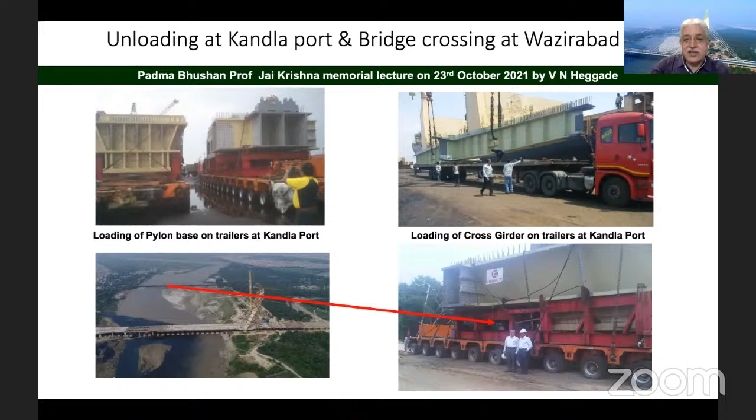Finally, it was transported to the site location at Wazirabad for erection. The erection required meticulous planning. It was one of its kind, with no time-tested erection method for this peculiar Namaste-shaped, three-dimensionally varying asymmetrical pylon.

It was a prefabricated segmental erection. The method statement for erecting the bridge involved temporary construction structures and reinforcement. Internal temporary structures had to be arranged, along with rigging plans that needed to be meticulously planned.

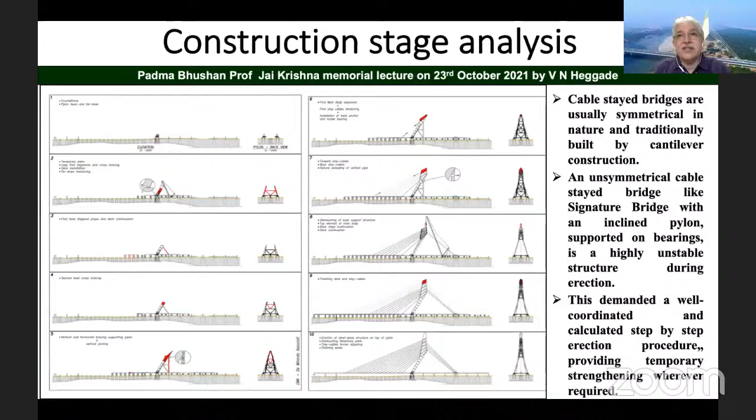During construction control, because erection doesn't go exactly as per the plan, deformation takes place, and that has to be checked. Calculations and structural checking had to be done. The construction stage analysis was meticulously carried out, and wherever required, temporary strengthening of the structure was done.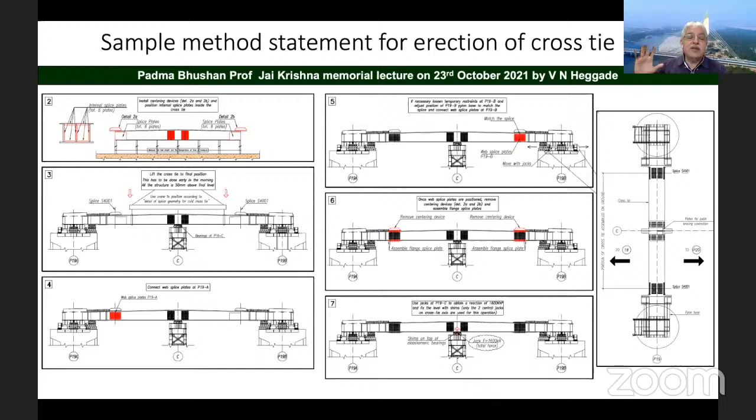This is just an example of how meticulously the rigging plan was also written in the form of a method statement, as you can see here for the erection of this element.

After examining and exploring various alternatives, it was decided that on the river side, the pylon and deck erection would take place using the Goliath gantry on top of the temporary bridge constructed over here. On the land side, the girders as well as the precast panels, which I'll explain later, could be erected using a separate crane dedicated for that purpose.

For the pylon erection, after alternatives were considered, a 1,250 ton capacity crane as well as a tower crane attached to the pylon could be used. This was analyzed and adopted.

You can see some views of the cross girders erected on top of the temporary trusses shown here. These are the temporary trusses, and you can see the pylon deck and deck girders being erected using the overhead gantry, or Goliath gantry, running on gantry cranes supported on the temporary trusses. These are some views of the trusses.

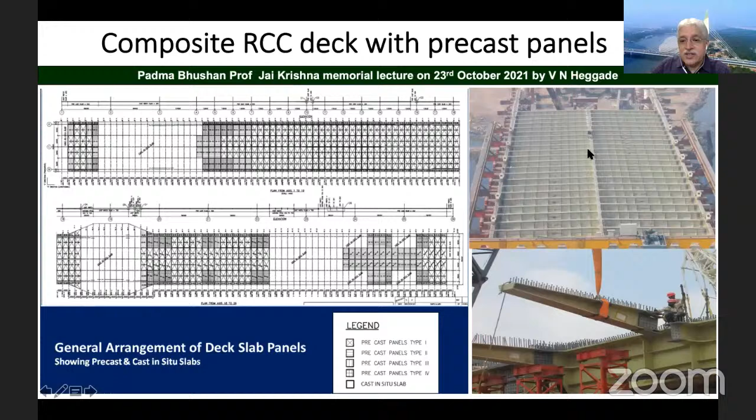Precast panels were used for the RCC composite deck construction. On the already erected cross girders and longitudinal girders, precast panels of around 8 meters to 4.5 meters were placed, with sizes varying by location, weighing around 30 tons each. These precast panels were cast separately.

These are views of the cast-in-situ joint and how it is jointed at the location. This shows the embedment of the steel plate provided in the precast panel, so it can be supported on the already erected girder, with a specially designed stopper to support the precast panel. Some loop joints were also provided in the form of reinforcement loops.

These are views of the precast panel casting yard, showing the casting activity, shuttering, curing, and stacking of the precast panels, along with the Goliath gantry or bed gantry for handling panels of 30 tons. Once cast, the panels were brought on top of the already cast deck, and a motorized trolley was used for transporting the precast panels.

Once this was put into position, the cast-in-situ, shrinkage-free concreting was done to ensure the monolithic connection was assured between the two panels.

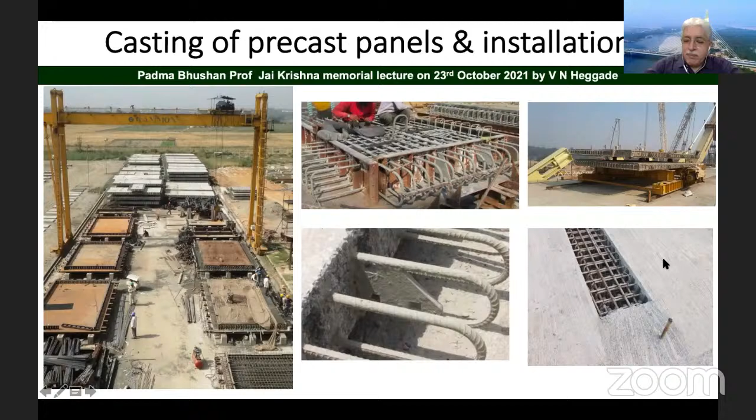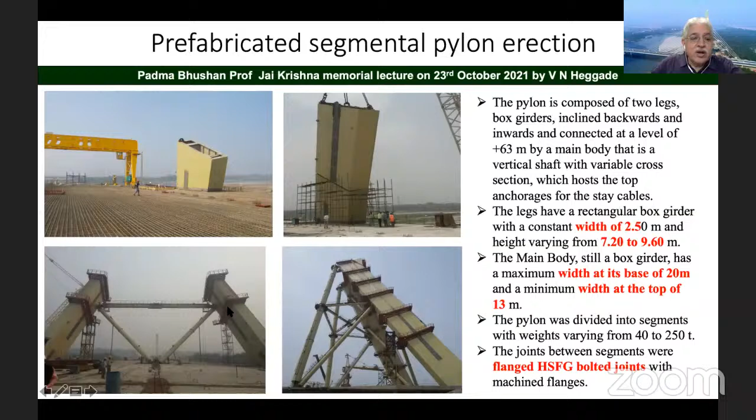These are some views of the pylon, with the pylon legs being erected. The most important thing for the erection of the pylon was the temporary structure support, equipped with many jacks at the end, so that if there is any deformation, the jacks can be used to achieve the required geometry - both horizontal and vertical jacks. The vertical jacks were attached to this temporary supporting structure for adjusting the geometry of the pylon as it was erected.

During the erection, there was a tie-down system, used up to the erection of the legs, up to the L5 legs. This tie-down was constructed with a foundation housing anchorages for 31T15 cables. By operation of these temporary pre-stressing cables, anchored in the foundation as a tie-down, the maximum force applied on this temporary system was around 690 tons.

When the L5 segment was erected, and by the time of erection of the L7 segment, this temporary tie-down system was relieved and dismantled, and the entire load was transferred to the temporary supporting system.

The most important and crucial unsung hero of this project is the 3D turntable, which was specially designed. Without this, I don't think erection of the pylon would have been possible. It was very ingeniously designed - it enables rotation in both the longitudinal and transverse directions.

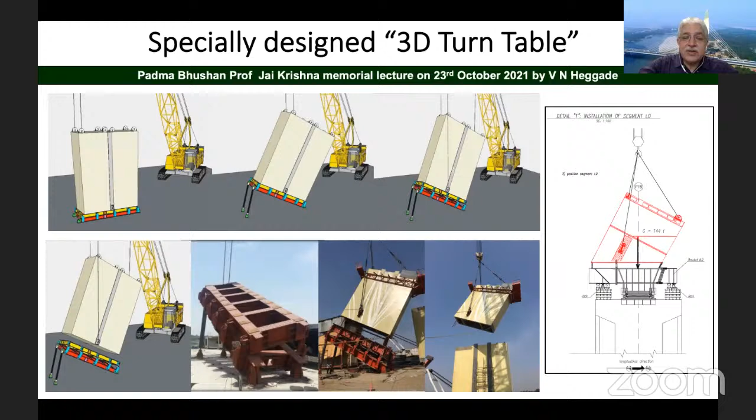So this turntable is the key factor for the successful erection of this project. These are some views - at the time of takeoff position, and at the time of landing the segment using the crane. It's adjusted perfectly to the orientation so it can be taken off vertically and placed on top of the already erected segment. That's how the prefabricated segmental erection was done.

As the segments were erected, the pylon grew in stature, and the pylon legs merged at the planned locations. Once the pylon legs merged, we were confident the pylon was growing as planned, confirming that the fabrication and trial assembly carried out in China was perfect. This erection was done completely in-house through in-house engineering. Here is the location where the pylon merges, and after merging, the pylon continues growing through the segmental prefabricated erection.

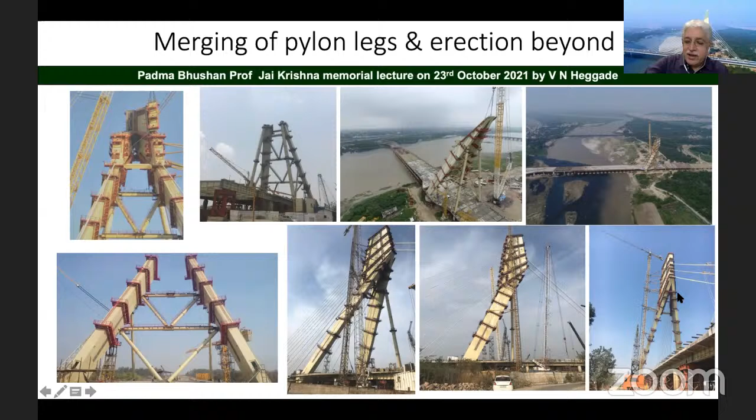This is a temporary tower crane which has been attached to the pylon as it goes on. Due to the sun's movement from one direction to another, the pylon legs, before being merged as a single body later, were moving drastically, as you can see here. This movement was monitored, and the temporary supports were fixed at a particular time when the pylon legs had moved so that the temporary location's geometry perfectly matched the required geometry.

One end of the temporary support was fixed earlier, and during the daytime it was allowed to move freely, while the other end was made to slide. When this sliding end reached the location where the geometry matched, the bolting of that sliding end was done.

Even after the merging of the pylon at the body location, as you can see here, the pylons were moving from daytime to evening, almost 40 mm in the longitudinal direction and around 25 mm in the transverse direction. This had to be perfectly monitored, and this environmental deformation of the pylon due to temperature variation has to be taken into consideration while erecting the pylon, apart from the deformation that normally takes place due to loading as well as pre-stressing.

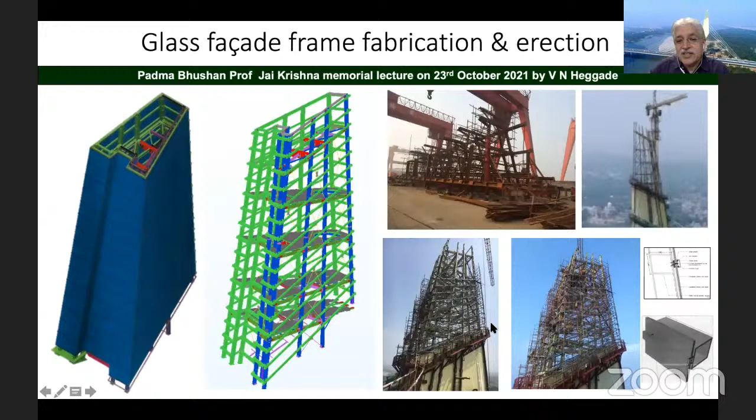As you can see here, this was also fabricated in China, and the trial assembly was done, then brought to the location and erected. Once this was erected into position, the glass facade panels were taken on top, and with a precisely designed methodology, the glasses were attached to this viewing gallery, as you can see here.

These are some views as the pylon grew in stature. You can have a look at these different views. Even during construction it was looking majestic, as you can see here. And these are some views which have been taken using drones during the construction.

You can also see the barrage bridge, which was always perennially congested for travelers, which was made easier later for the onlookers.

And these are some of the accessories and pylon access arrangements, as you can see here. This is the pylon access arrangement, with cage ladders as well as temporary platforms fitted in.

Also most importantly, this tower crane was telescopically adjustable and telescopically extendable. As the pylon grew, a special connection had to be designed between the tower crane and the pylon, so that unscheduled forces were not induced from the pylon to the temporary crane, or from the temporary crane to the pylon, damaging either the pylon or the temporary cranes.

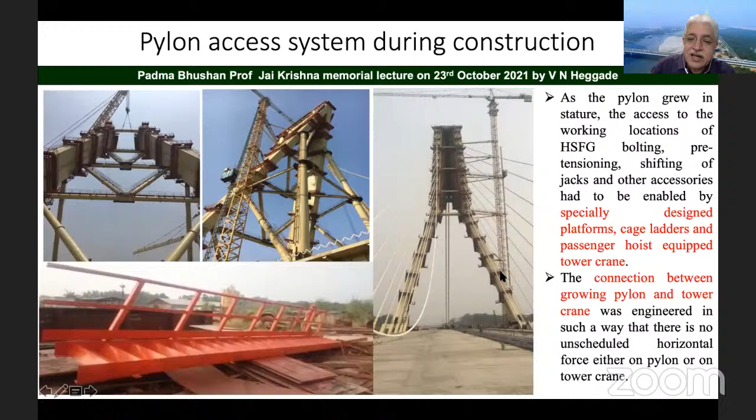The tower crane was also equipped with a passenger hoist for transportation of laborers, as well as jacks and other materials required as the pylon grew, since it is not always possible to send laborers and materials via the cage ladder connected to these platforms.

The peacock graphics were painted on top of the pylon segments during erection, as you can see here, within a temporary shed constructed at the site itself. This is a 3D turntable. You can see the temporary platform attached to the segment, and the peacock graphics were embedded on the segments using the grid method.

While doing the painting, it was ensured by application of negative 3M masking tape that after the painting was done, the tape was removed so that the painting did not spill over, and remained within the peacock graphics representation, as you can see here.

Finally, befitting the stature of this particular bridge, it was inaugurated with grand fanfare, emotional speeches by Manish Sisodia as well as Kejriwal, the Chief Minister of Delhi, and also an exciting laser show, on 4th November 2019, to the public.

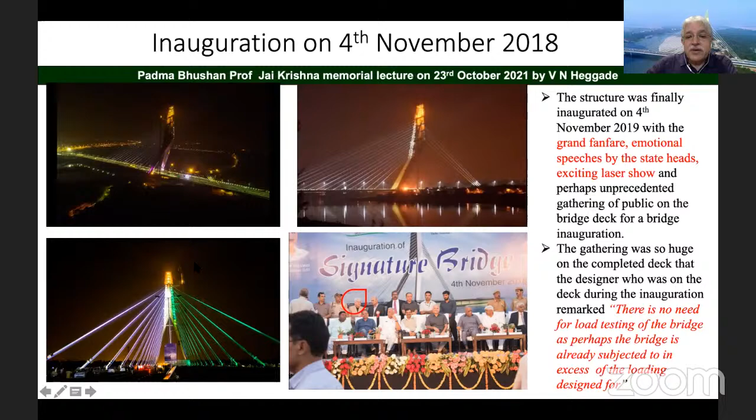At the time of commissioning of this bridge, the temporary tower crane attached to the pylon was still there. It was necessary because the glass facade was not yet erected. The glasses to be attached to this frame were not completed, but the bridge was a need of the hour at that time. The glass facade was done later, after the commissioning or inauguration of the bridge in November 2019.

In my opinion, some of the accessories used, such as the 1,250 ton crane, the 3D turntable, the 36-meter long machinable milling machine, the temporary supporting arrangement designed by Miranda, and the RCD rig used for construction of the hybrid foundation, will be the unsung heroes of this signature bridge, of its once-in-a-lifetime kind, because these will not be seen anymore, while the signature bridge stands tall, receiving accolades and recognition appreciated by onlookers for years to come.

This bridge had to be administered and managed in a manner that is not done anywhere, not taught in any business school, in my opinion, because 9 to 10 countries were involved in this bridge. We used to have stakeholders meetings—I think at least 10 or 12 stakeholder meetings involving all the stakeholders.

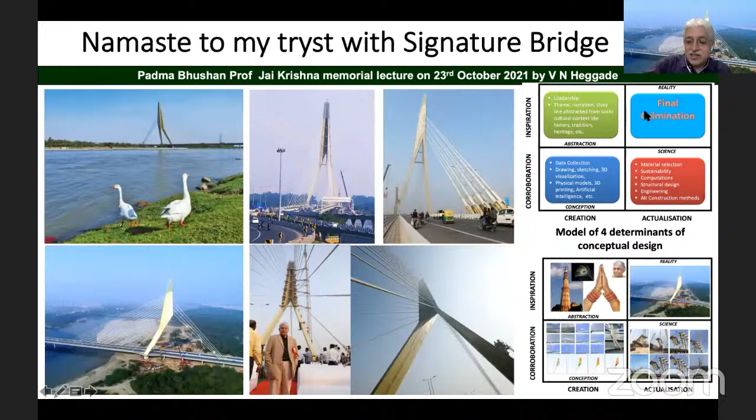During the construction of this bridge, I also happened to devise my own model of 4 determinants of conceptual design, as you can see here. It was possible only because of this bridge. I could form this model of 4 determinants of conceptual design of structures because of this particular bridge. So I am particularly very grateful to this bridge.

Thank you very much, and I would like to hand over this virtual dais to the organizers. Thank you.

I think you are mute. You're mute, I think. I don't know, he's not. Chairman sir, can you hear me?